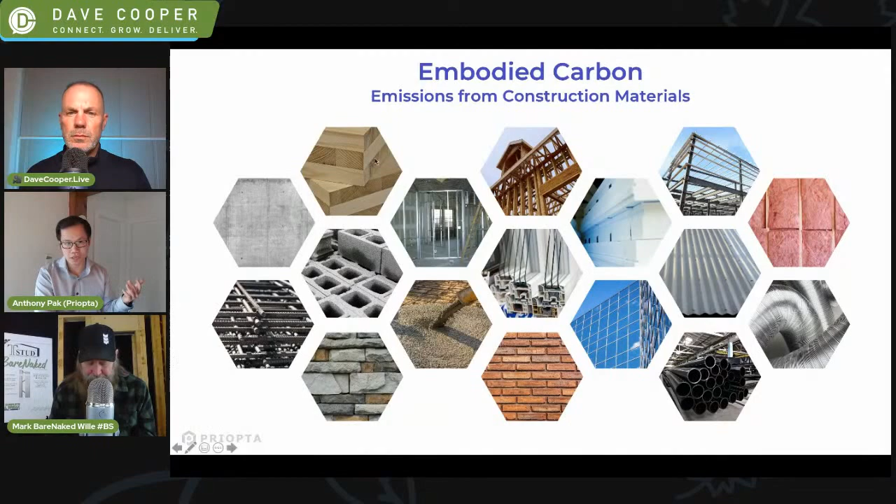All right, so why embodied carbon matters. Just to reiterate what it is, we're talking about the emissions from all the construction materials. That's embodied carbon, throughout all the life cycle stages. These images represent everything from resource extraction, transportation, manufacturing, construction, operation, end of life. So we're quantifying all of those emissions.

So how big is the problem? If you look at global CO2 emissions annually each year, about 28% of global CO2 emissions goes towards operating all of the buildings on the planet. Think of all the buildings, what it takes to heat and cool and operate those buildings - that's 28% of the CO2 emissions. A further 11% goes towards the embodied carbon. That's all the new construction that's happening each year and the major renovations - the materials associated with that new construction, that's 11% of global CO2 emissions.

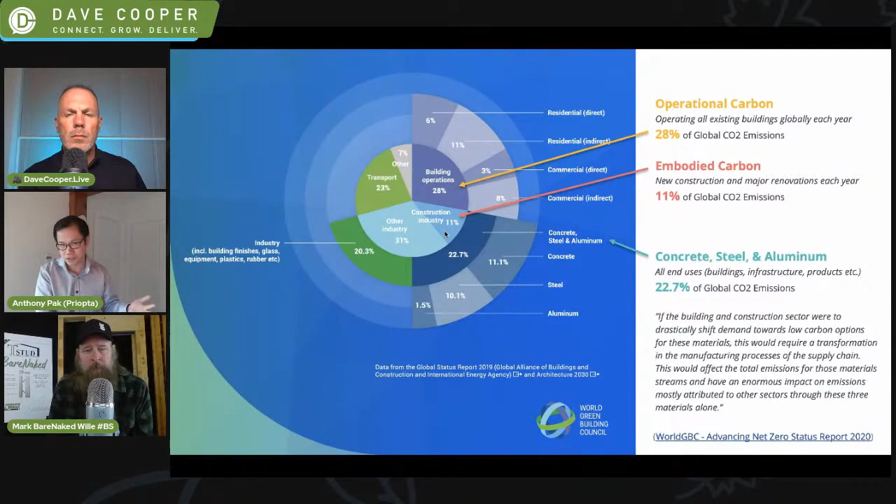What's interesting is if you zoom out even outside of the construction industry and just look at three of the key materials that are oftentimes used - concrete, steel, and aluminum - combined, they make up almost a quarter of global CO2 emissions. Obviously we don't use all the concrete, steel, and aluminum only in the building sector. We also use it in infrastructure, to build bridges or build cars, et cetera. But why I point this out is because if we can influence the supply chains of some key materials within the construction industry, that has repercussions beyond the scope of our industry. We can influence how infrastructure gets built and the supply chains of that, or of auto manufacturing or whatnot.

So we're building a lot of buildings. If you just look only at the new construction that's taking place over the next 30 years, about half of the emissions associated with that new building stock over the next 30 years is associated with embodied carbon, with the other 51% on operational carbon. That's particularly significant because we're building a lot of new buildings - it's essentially equivalent to being projected to double all the building floor area that currently exists over the next 40 years.

To break that statistic down in another way, that's equivalent to building an entire New York City, all the buildings that exist in New York City, building that floor area every month for the next 40 years. So obviously, if we're going to try to hit any of our climate goals, it's going to be really important that we actually address embodied carbon as well, not only looking at the energy use and the operational carbon.

Anthony, is that number you gave the residential and commercial construction industry combined? Yeah, all buildings.

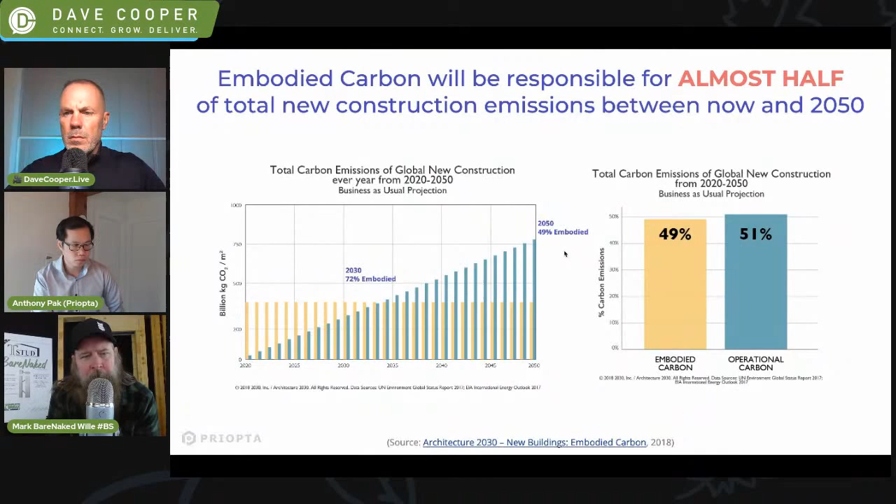So then embodied versus operational carbon, how do you compare them? The key metric I'm going to look at is kilograms of CO2 equivalents, that's the little e, per meter squared of floor area. That way you can put the two metrics on a similar plane.

So when we're looking at a typical building, let's say hypothetically this building lasts for 60 years. These yellow bars represent the operational carbon, the emissions associated with operating, the energy use and the operation. This is what we quantify when we're using energy modeling, and this has been the main focus of the green building sector for a long time.

But also for a long time, we've been ignoring the embodied carbon, which is these red portions of the bar. Up front, before the building is even in operation, there's all the materials that go into that initial building structure and envelope. Then there's also the replacement and maintenance, so over time we're replacing these materials. We account for that, so for certain components, if they don't last the full lifespan, we account for that. And then also there's a pulse of emissions at end of life. To quantify that, we use what's called life cycle assessment, or LCA.

Question on that for the life cycle assessment - like you said, you're accounting for some of the materials to be replaced because they have an end of life. What's the metric for that? Is that determined based on each product? Yes, for each product there's a certain assumed service lifespan. For many of the software tools that we use, they have default assumptions for each material category, and in some of the software tools you may be able to override those assumptions. So if you have better data, or for your specific building you think it's likely to be replaced more or less often, you can account for that for every component of the building.

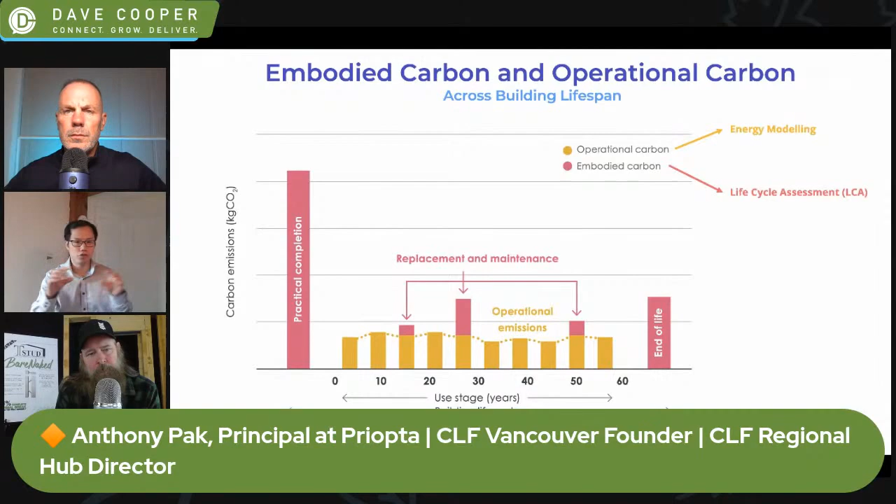But in the context of buildings, there's another class of software that's specifically for buildings. They're designed with all the data on common construction materials that are in buildings. So you're basically doing quantity takeoffs for your building, looking at how much wood, steel, insulation, etcetera, you're using, and mapping that to a database that has a lot of that underlying data.

Furthermore, there's a thing called environmental product declarations, EPDs. This is where manufacturers essentially have a life cycle assessment done of their supply chain, and they're able to produce a third-party verified document that says, per meter cubed of concrete, this is what the emission intensity of my product is. Some of the whole building LCA tools also draw on that type of data.

Got it. Yeah, love it. All right, so...

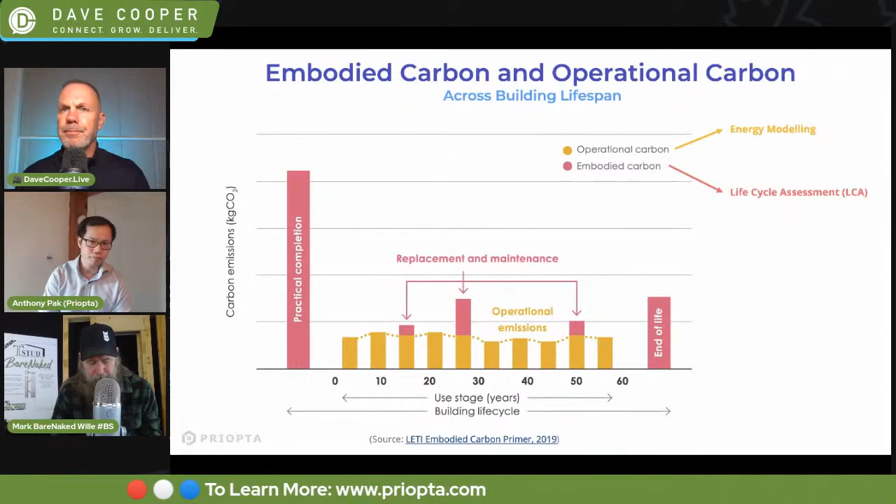When we're doing life cycle assessment, most people are mainly focused on the carbon side of the equation. There's an environmental impact category called global warming potential, or GWP. So if you see that acronym, that's what it means, that's what we're referring to when we say embodied carbon. But LCA actually looks not only at carbon, there are other environmental impact categories as well.

In North America, we look at things like acidification potential, eutrophication, smog formation, depletion of non-renewable energy, and ozone depletion. In North America, we mainly focus on six. In Europe, there's something like 18 other impact categories as well. But just so you know, the GWP is what most people are focused on when they mention embodied carbon.

When we're talking about life cycle stages, there's a formal definition for each of these. Module A is looking at the upfront carbon—everything from resource extraction, transportation, manufacturing, transportation to the construction site, and emissions associated with construction and installation. That's A1 to A5, before the building is in operation. Then B is the use phase of the building.

I'm going to comment on the first ones. For a lot of people that came into this world via the green or sustainable market, that's why with the movement of the USGBC you saw the 500-mile radius and the 250-mile radius. They were inclusive of it, but these data metrics weren't something project managers or consumers were involved with—that was the overlaying rationale of saying locally we could reduce carbon by keeping it close, and if you don't have the product close, find an alternative that is.

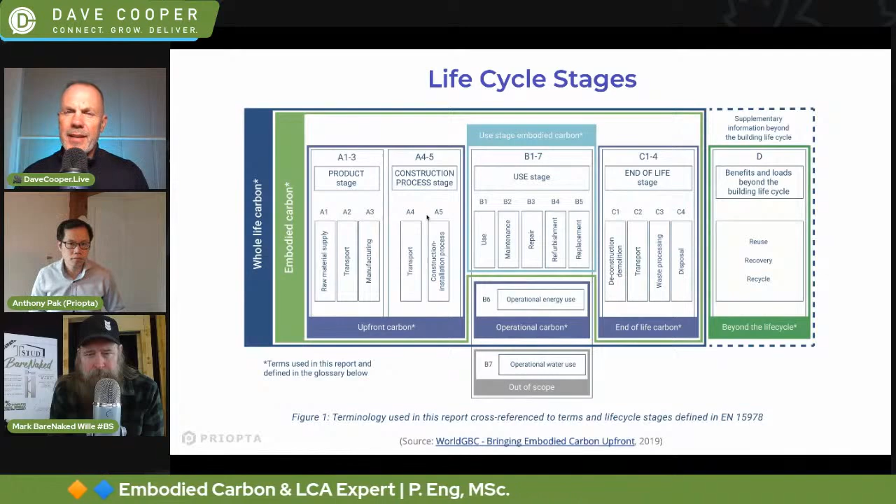Exactly, so the life cycle is what I'm hearing. Before, it used to be based on mileage and transportation, right? That was the day - within 250 miles you get so many points, 500 miles you get so many points. But what I'm hearing you say, Anthony, is that it starts at the manufacturing level, maybe even further back in getting the raw materials and where they're coming from. So you look at that whole life cycle of a product to determine the stages.

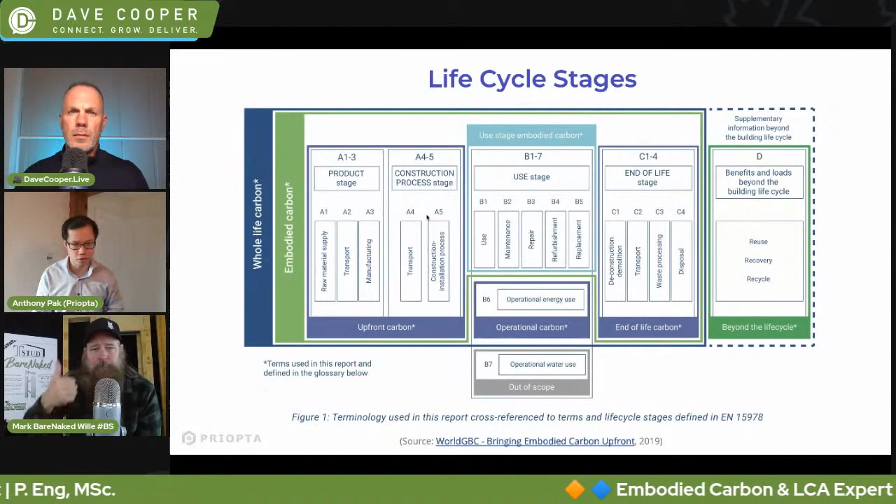Exactly, yeah, so that's what LCA is - you're looking at all the life cycle. Historically, the green building rating systems might award certain amounts of points, and they still do, on certain attributes of the product. But what I'm saying is, to get a more holistic picture, you really want to look at all the life cycle stages. So there's the use phase, and then there's also the end of life stage, right?

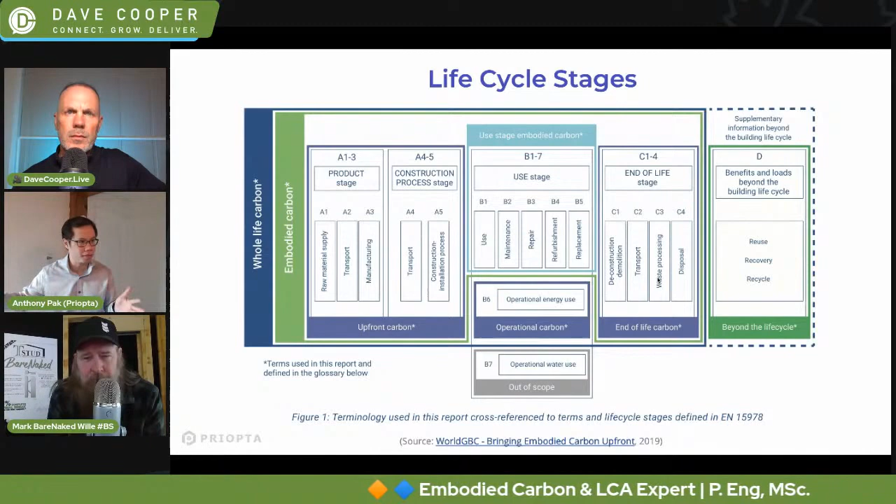So for any given material, how is it deconstructed, transported, and waste processed? Does it go to a landfill? Does it get recycled? That all affects the carbon side of the equation. Does it get reused? So when we're reporting LCA results, we're typically looking at A to C as the range of results - that's the primary set of results.

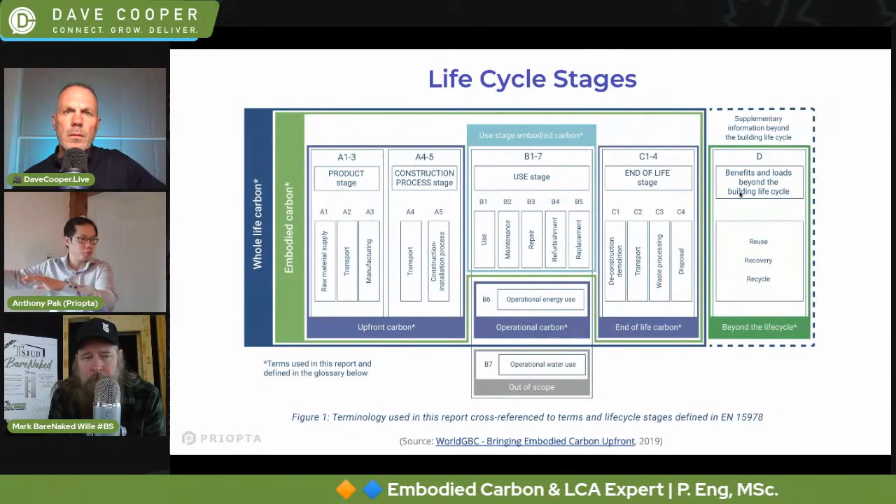And then we also have something called module D, which looks at benefits and loads outside of the system boundary of your building. For example, if you're trying to account for the benefits of reuse or recycling, that impacts a future product potentially, right? So how do you assign the benefits of that? Sometimes we actually report this information as supplementary information, but the main set of results is here.

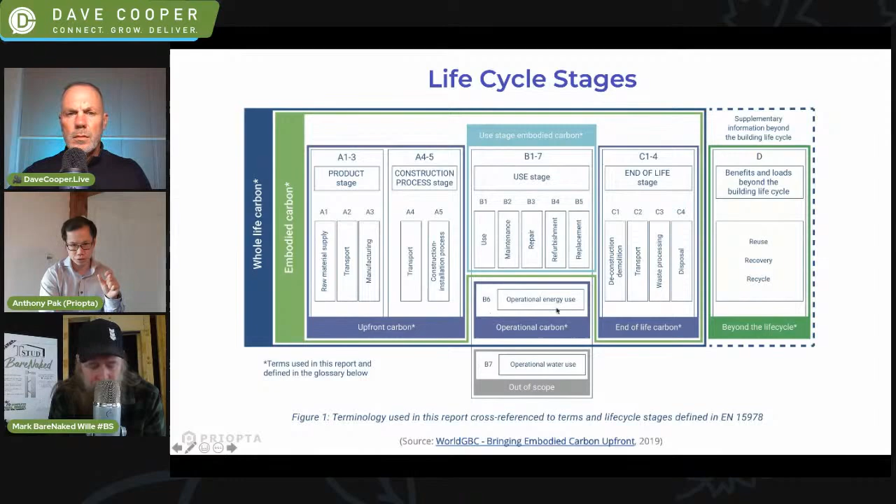So that's on the materials. And then you'll notice B6 is operational energy use, or operational carbon - that's what you would have gotten from energy modeling. So basically, if you marry those two pieces together, the LCA and your energy modeling numbers, that gives you a more holistic picture of what's the whole life carbon of the building - like the total carbon footprint, so to speak, of the building.

A lot of this really echoes the cradle to cradle programs, but your approach is certainly different.

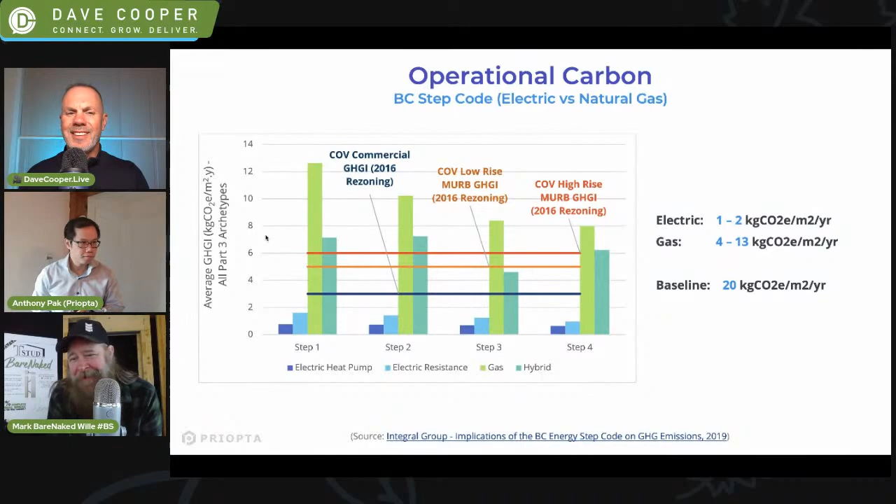You want to stop for a question, Anthony? Sure, yeah, we can. One question, or several, because it's lit up. All right, let's get into this.

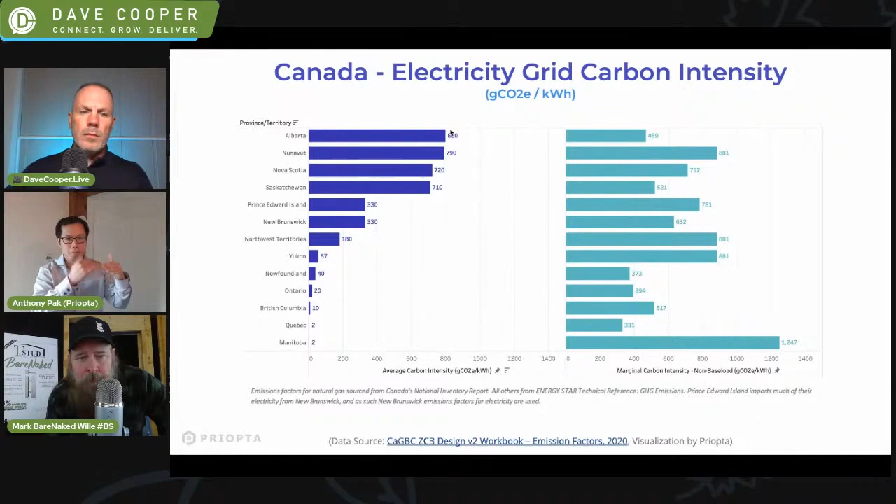So if you're installing photovoltaics, the benefit you're offsetting relative to the grid depends a lot. If you're in British Columbia, it already has a fairly clean electricity supply, so what's the actual relative benefit? Some people argue you shouldn't compare against the average carbon intensity of your electricity grid, but rather the marginal intensity. There are also marginal grid factors as well.

In the marginals, outside of base load, do you need to fire up a natural gas peaker plant or something like that? And if so, what's the carbon profile there? Some people say you should compare against that instead. Generally speaking, PVs are very low carbon in the grand scheme of things when you account for all of this, but the specifics depend a lot on how you're comparing the grid mixes.

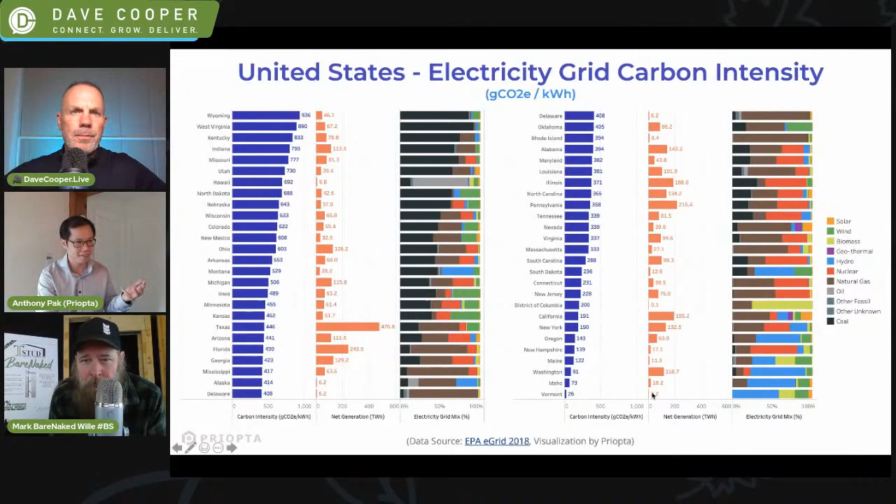The red graphs show you the net generation, how much electricity is generated each year. Texas is a very big state, so it produces a lot of electricity. Vermont can be really low carbon, but they produce very little electricity in the grand scheme of things. So it gives you a sense of the picture across all the states.

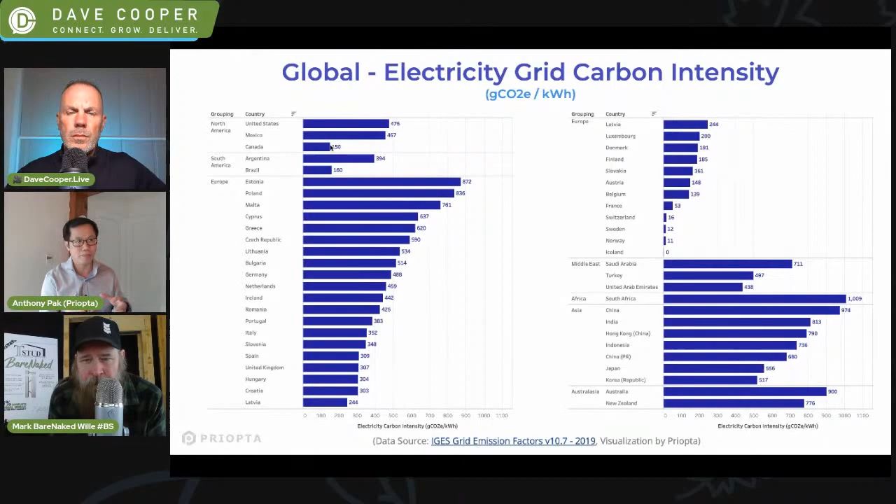If you want to see one more, this is the national average for different countries. Canada is around 150, but when you break it down by province, you have a bunch that are 20 or lower, and some around the 800 range, so they average out. This affects a lot on the operational carbon side of the equation, but it also affects your embodied carbon depending on where you're producing the materials. So just circling back to that point.

I normally fall asleep when someone puts graphs on—I look at them as a flight of stairs to the Hancock. Well, you're going to fall asleep a lot today.

But I tell you, what comes across in your graphs is a clear picture, and you bring the passion to it. This isn't a topic everyone could digest, and that's one of the reasons why it works. Bless your heart for your style of bringing this forward. Thanks. You add a whole lot of enthusiasm to it, and you explain it very easily.

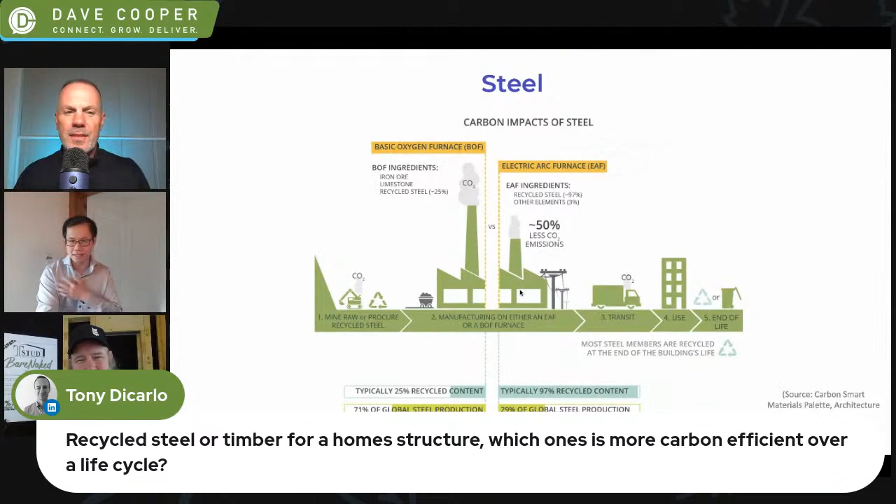Perfect. So steel, there's two main ways of producing it: basic oxygen furnace (BOF) and electric arc furnace. BOF uses less than 25% recycled content - mostly virgin iron ore going in - and it makes up about 71% of global steel production. A lot of the steel in Asia is BOF. In the United States, about two-thirds of the steel is electric arc, and the other third is BOF. BOF is the higher emission aspect of steel compared to electric arc.

Electric arc is typically about half the emissions, could even be much less than half. Electric arc furnace uses a lot of recycled steel - mostly recycled steel scraps, up to like 97% recycled steel - and makes up about 30% of global steel production. Because it's an electricity-driven process, if you think back to those graphs I showed earlier about carbon and electricity grids, that affects it a lot.

For example, steel from Seattle, which has a relatively lower carbon intensity grid, their electric arc furnace steel—like rebar—can be fairly low, maybe even a fifth of the impact compared to BOF. So yes, recycled steel does make a big difference. It's a similar story for aluminum. For most metals, they're already highly recycled, but there's not enough recycled metal around to satisfy all of our demand, which is why primary production still matters. So even for your project, I'd definitely incentivize and focus on recycled content.

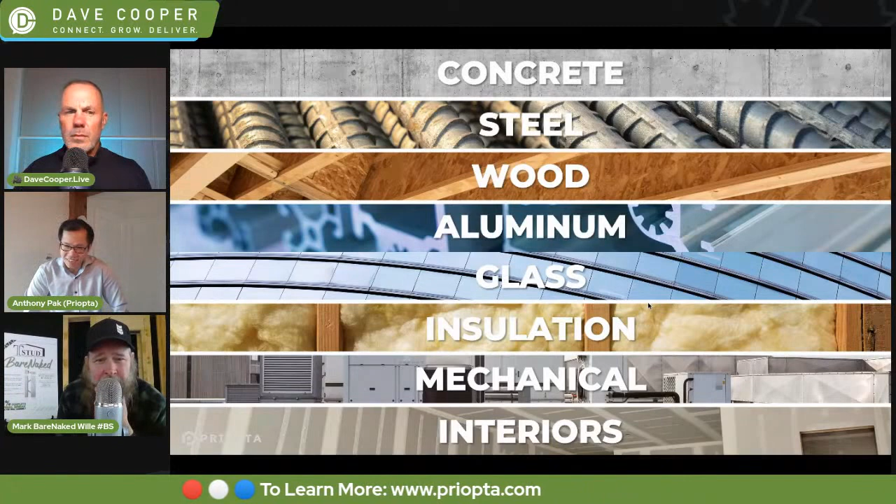Perfect, this is exactly what we hoped for, right? More conversational. I enjoy having it more conversational rather than doing presentations where I spend a full hour just plowing through slides. Well, let's keep going through some of these comments and questions, some of them are more comments than questions, but that's what it's all about.

All right, so Kathy Ayers is where we left off. Paul Eck mentions pellet stoves. Mikkel says, awesome data and explanation, Anthony, from YouTube. Thank you very much for joining us today.

All right, moving on. Kathy, is Greg Ugalde tuning in from Twitch, or is he at an IBS pre-conference? My guess is this is winter conferences, so I haven't seen him pop in, but that doesn't mean he's not listening.

Thumbs up if you'll watch this tonight on Dave Cooper Live Netflix. If you guys don't know, every once a month we're lucky enough to have the immediate past chairman of the National Association of Home Builders. He's the one that updates the president on what's happening in housing. Whether you like whoever's president doesn't matter, he's still the person that gets to do it, and that's an honor in my opinion. I think with that said, definitely tune in.